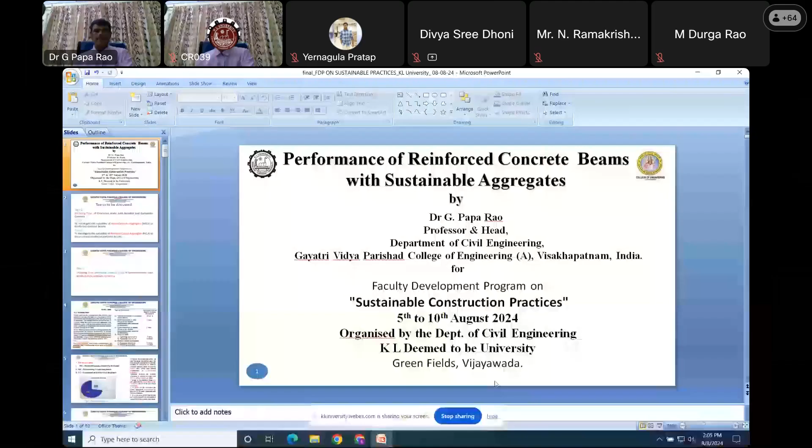System, system. Madam, is it visible now? My presentation... Good afternoon, sir. Screen is not visible, sir. Not visible, yes. Sir, you do one thing - share the screen, sir. Once you close that sharing option, share it again, it will come. Yes, sir. Now, sir. Yes, fine, title slide is there. We can proceed, sir.

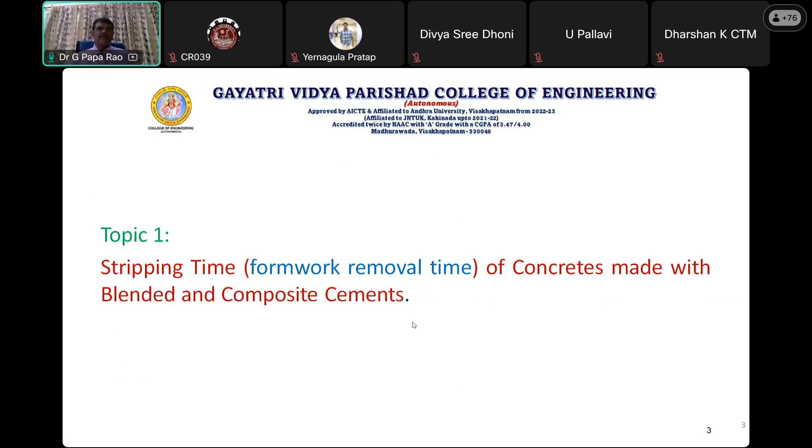One is in normal circumstances where ambient temperature does not fall below 15 degrees centigrade, and the other is where ordinary Portland cement is used. These are the two conditions given in IS 456. But whatever stripping time given in IS 456 is valid only for ordinary Portland cement.

The code is silent about blended cements, because nowadays 70% of cement being consumed is from blended cements like Portland Pozzolana cement, Portland slag cement, and also a new variety called ternary cement or composite cement. The code says for other cements and lower temperatures, the stripping time recommended above may be suitably modified - meaning for cements other than ordinary Portland cement, and for temperatures below 15 degrees centigrade, these stripping times may need modification.

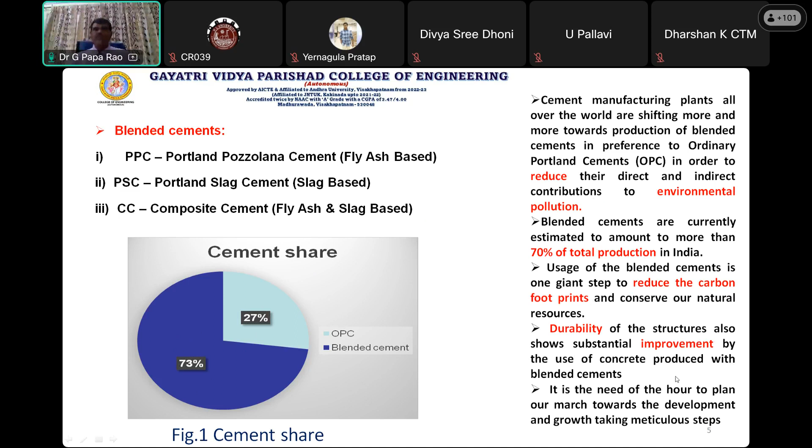All of you are aware about the advantage of blended cement. It reduces the direct and indirect contributions to environmental pollution, and also reduces the carbon footprint. Also from a durability point of view, durability of structures shows substantial improvement by the use of concrete produced with blended cements. This figure shows the carbon dioxide emissions for different cements. As you can observe, the carbon dioxide emissions for blended cements are less than ordinary Portland cement, and the main constituent of cement is clinker.

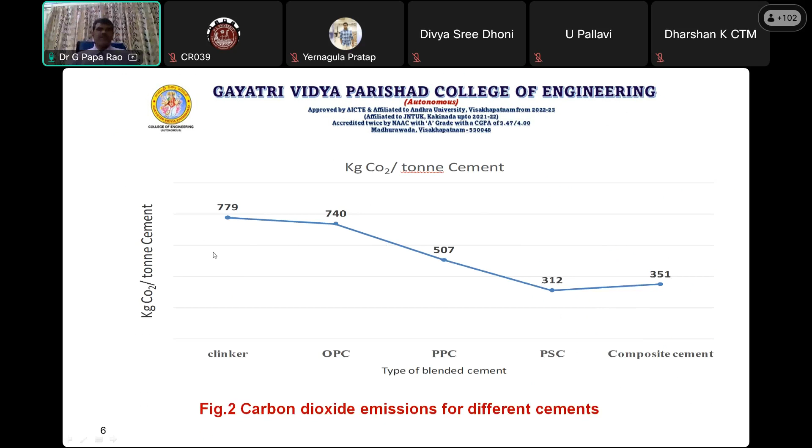In our study, we have considered 4 types of cements. All these cements were procured from a manufacturing unit near Visakhapatnam, 100 kilometers away, which is My Home Industries Private Limited, manufacturing Maha Cement. This company has set up their organization at a location called Narsipatnam, which is 100 kilometers from Visakhapatnam.

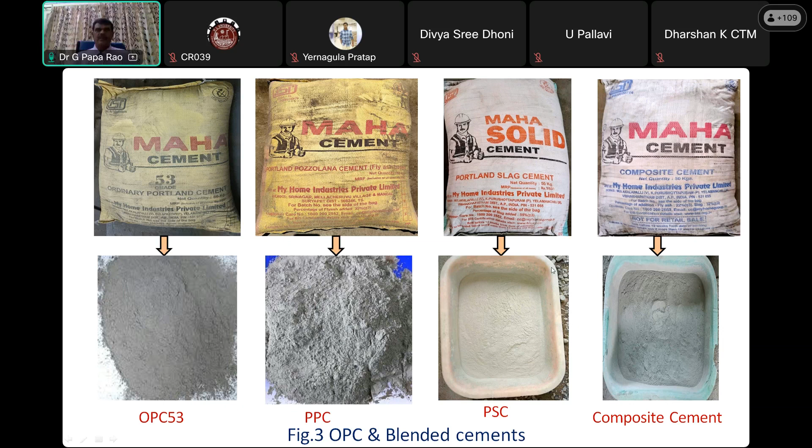We requested them to provide 4 varieties of cement, because we did not purchase from local distributors - for better compatibility, we took all 4 cements from the same manufacturer directly from the manufacturing unit. So we procured OPC 53, Portland Pozzolana cement (fly ash based), Portland slag cement, and composite cement, all procured from Maha Cements at Narsipatnam. This is a new cement that has come into the market, called composite or ternary cement.

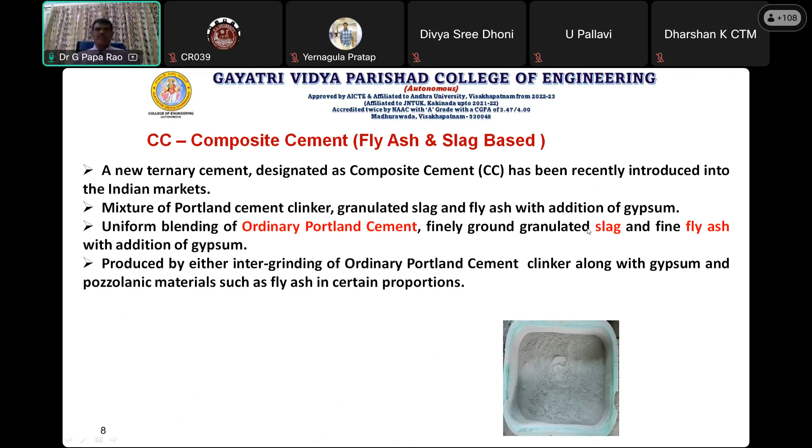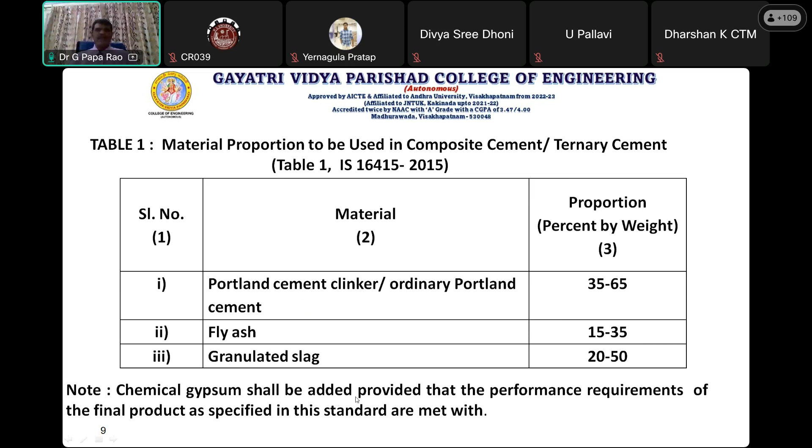This is the combination of ordinary Portland cement, slag and fly ash with addition of gypsum - this is the material proposed to be used in composite or ternary cement. In composite or ternary cement, the Portland cement clinker consists of 35 to 65% by weight, fly ash is 15 to 35%, and the granulated slag is 20 to 50%, plus some percentage of gypsum, provided the performance requirements of the final product as specified in the standard are met.

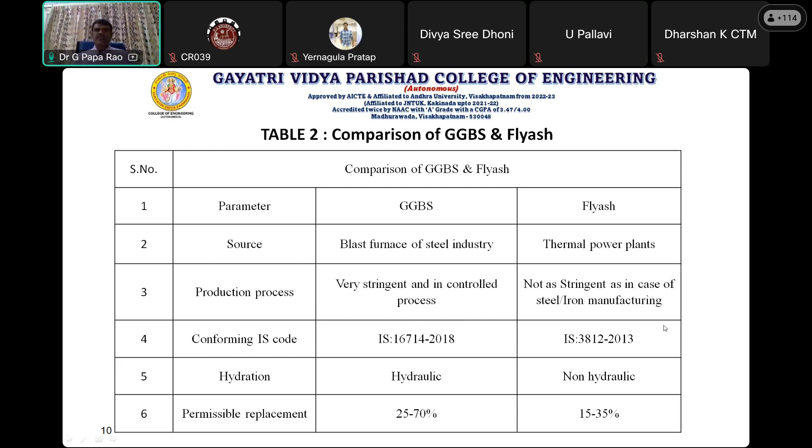GGBS is a pure hydraulic material - if you add water directly to GGBS, it will produce pozzolanic properties. Fly ash won't directly react unless you add some cement, hence it is non-hydraulic. The permissible replacements differ because of this pozzolanic nature: GGBS can be used up to 25 to 70% for industrial applications, while fly ash is up to 15 to 35%.

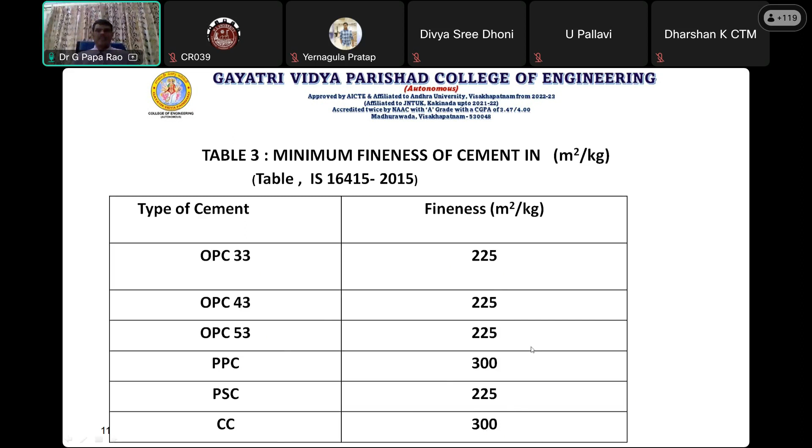This slide shows the minimum fineness of cement. As you can observe, OPC is 225 for all three grades - 33, 43, 53. Composite cement, if you observe, is 300 square meters - this is much finer cement compared to the other blended and ordinary Portland cements.

Before using all the 4 cements, we have assessed whether our cement is okay or not, whether the strengths are being achieved. For that, we have tested the compressive strength of cement for 3 days, 7 days, and 28 days, and taken these strength values from IS 12269.

For OPC 53 grade cement, the minimum strength should be 27 MPa at 3 days, 37 MPa at 7 days, and 53 MPa at 28 days. Similarly, OPC 43 requires 23, 33, and 43 MPa respectively. For OPC 33, the compressive strength must be 16 MPa at 3 days, 22 MPa at 7 days, and 33 MPa at 28 days. This covers ordinary Portland cements.

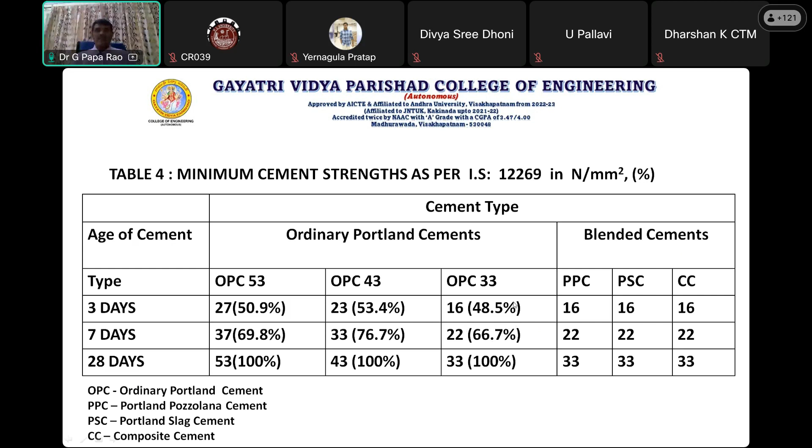For blended cements - PPC, PSC, and CC - at 3 days the strength must be 16 MPa for all, 22 MPa at 7 days, and 33 MPa at 28 days. Our blended cements possess strength equal to OPC 33, meaning at 28 days it should get a minimum of 33 MPa.

So likewise, we have tested all 4 types of cements before proceeding for further investigations. We have cast the cubes with our standard size of 70 by 70 by 70 mm. As per IS code, minimum compressive strength for OPC 53 should get 27 MPa at 3 days, 37 at 7 days, and 53 at 28 days.

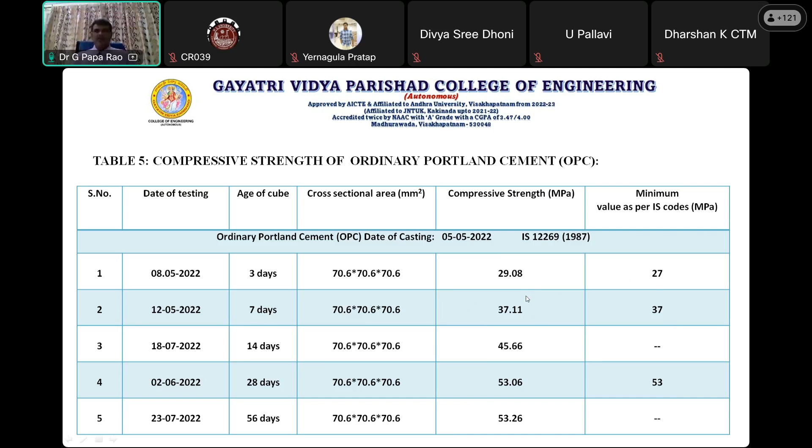These are the strengths obtained from our laboratory tests. We got 29 MPa at 3 days, 37.11 MPa at 7 days, and 53.06 MPa at 28 days. Therefore our cement is good, and we can proceed with further investigations using OPC 53 because it is almost meeting Indian standard specifications.

Similarly for PPC, the requirement is 16 MPa at 3 days, 22 at 7 days, and 33 at 28 days. Our laboratory tests got 16.3, 22.4, and 33.18. Therefore we can proceed further with PPC for further tests.

Similarly, Portland slag cement (PSC) we have tested up to 56 and 90 days also for durability testing. Here PSC got 16.04, 23.73, and 33 MPa. These values are meeting our Indian standard specifications.

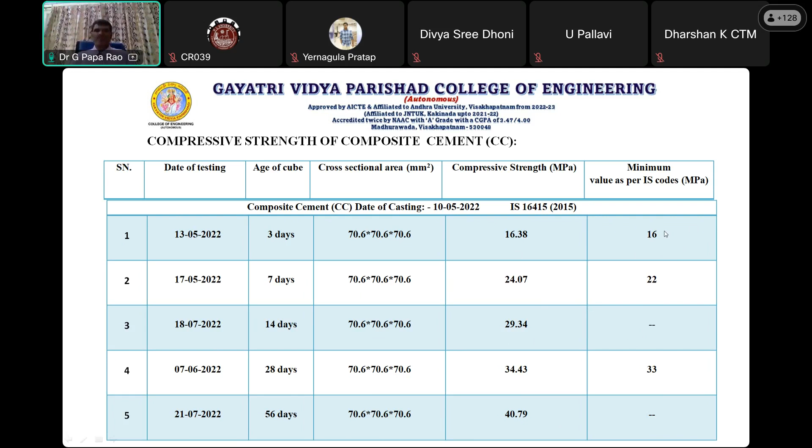Composite cement is a ternary cement, a mixture of OPC plus PPC and PSC, or fly ash plus slag plus clinker. It got 16 MPa at 3 days, 24.07 MPa at 7 days, and 34.4 at 28 days. Whatever cements we procured from mass cements, we confirmed their strengths before going for further investigation.

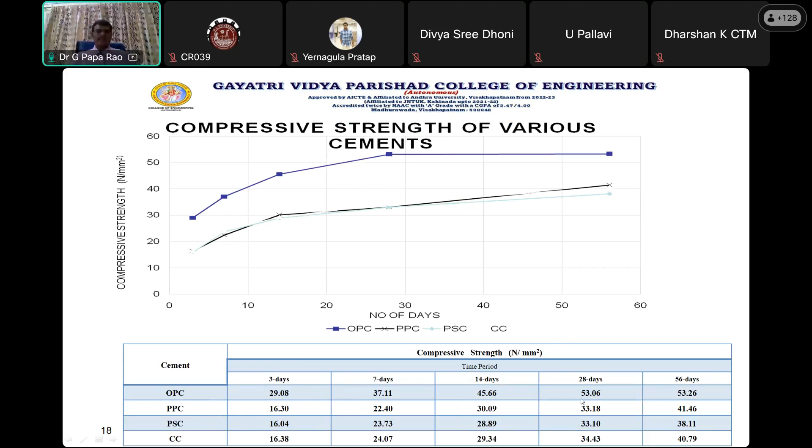This is the same table presented in another form - OPC gives 29, 37, 45, and 53 MPa, and similarly for PPC. These are the strengths we obtained, and we have chosen for concrete testing M35 grade concrete.

These are the mix proportions used for different grades of concrete with different types of cements - OPC, PPC, PSC, and CC. These show the consumption of different constituents: cement, water, fine aggregate, and coarse aggregate - the material proportions.

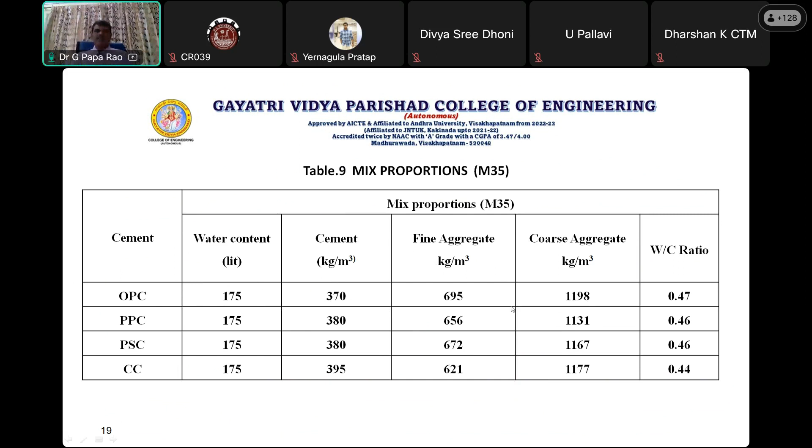Our focus here is to arrive at the stripping time for blended cements, because IS 456 speaks about stripping time only for OPC. Therefore we need to arrive at stripping times for the other blended cements.

At 7 days we got OPC strength of 26 MPa, 34 MPa at 14 days, and 44 MPa at 28 days. We estimated the percentage strength of OPC at 7 days with respect to 28 days: 26 by 44 gives 59%. Similarly, we calculated the percentage strength at 14 days with respect to 28 days. Our OPC M35 grade concrete got 78% at 14 days and 59% at 7 days.

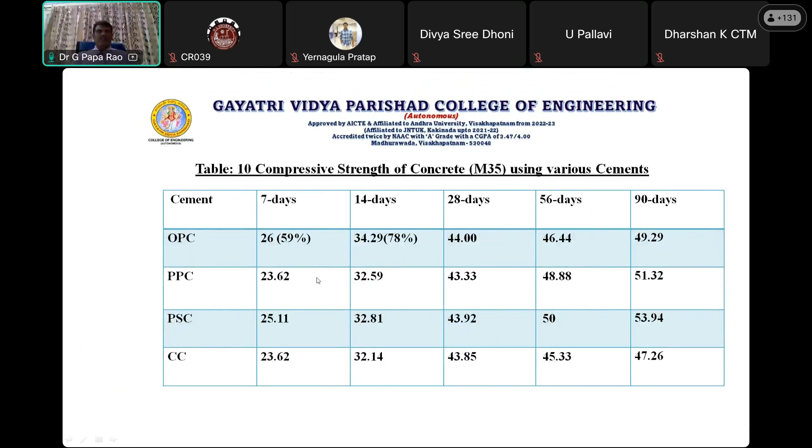Since we focused on 7 days and 14 days, if you observe, these align with the stripping times specified in IS 456. We have plotted a graph between the percentage strength of concrete and various types of cements, showing OPC reaches 59% strength at 7 days.

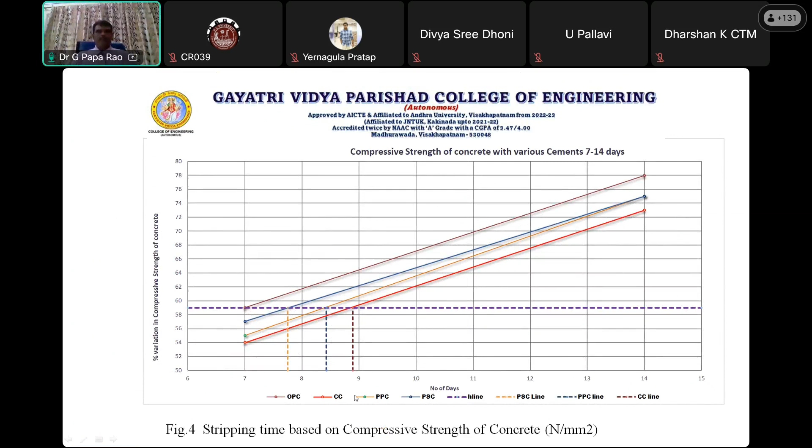We took this 59% as the baseline and observed at what duration the other cements like PPC, PSC, and CC achieve the same 59% strength. Our composite cement reaches this nearly at 9 days instead of 7, and PSC takes 8 days, also observed at 14 days.

Here our OPC is getting 78% of its 28-day strength at 14 days. So we have taken 14 days at 78% as the base, and compared at what ages our other remaining cements are getting the same percentage, 78%. If you observe, the other cements reach the same strength at 16 days, 17 days likewise. So we have tabulated the same.

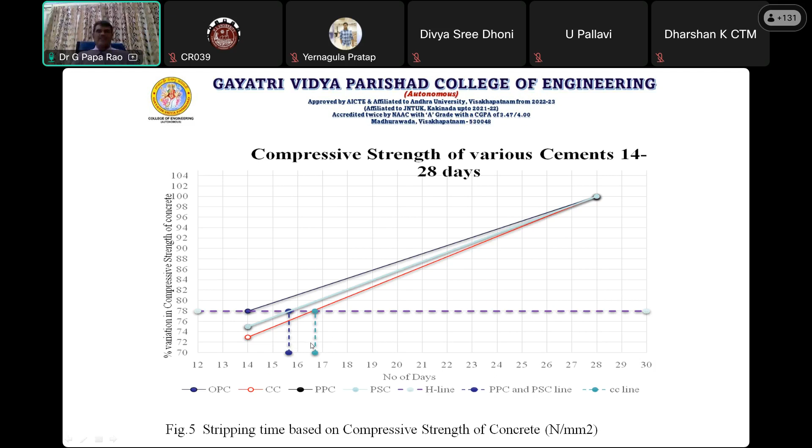Here the stripping time for OPC is 7 days. If you see PSC, slag cement, and PPC, Portland pozzolana cement, the same stripping time we are getting for PSC is at 8 days, and PPC is at 9 days. Again for composite cement it's 9 days, while for OPC it's 7 days.

Similarly, at 14 days stripping time, our OPC is 14 days, and the other cements are giving the same strength at 16 days and 17 days. So the conclusions we have drawn from our study is that the 7-day and 14-day strengths obtained in concretes made with OPC could be obtained only after 9 days and 17 days with blended cements.

Our stripping time for concrete made with OPC is 7 days, but if you use other blended cements like PSC, PPC, and composite cement, this time is delayed by another 2 days, to 9 days. Again at 14 days, this time is delayed by 3 days, to 17 days. So the stripping time of blended concretes is delayed by 2 days for 7-day strength and by 3 days for 14-day strength. These are the observations we have made from our study, arriving at the stripping time for concretes made with blended cements.

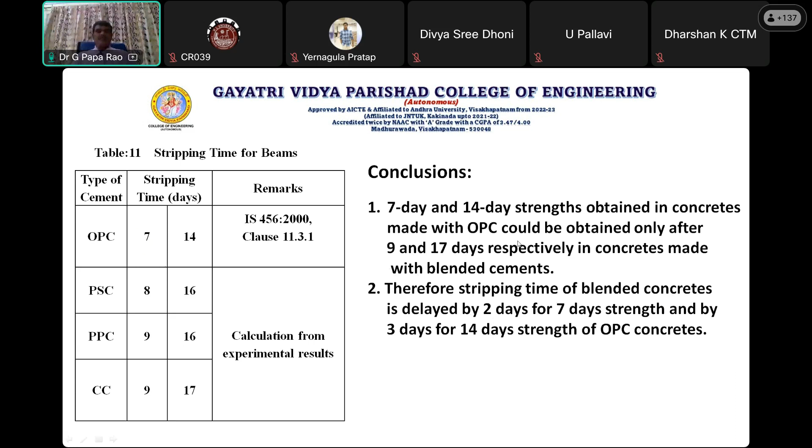So coming to my topic 2, this is also one of the sustainable development approaches using alternate coarse aggregate, because nowadays our natural resources, fines and coarse aggregates, are depleting soon because of the high-rise constructions, and therefore we need to save our natural resources by using alternate sustainable materials.

So this is one of the new aggregates we have developed. We have an MOU with NTPC and also with a national organization called Ecocarbon Private Limited, to carry out structural engineering studies for concretes made with nano concrete aggregate. So this nano concrete aggregate is the new material, one of the industrial byproducts.

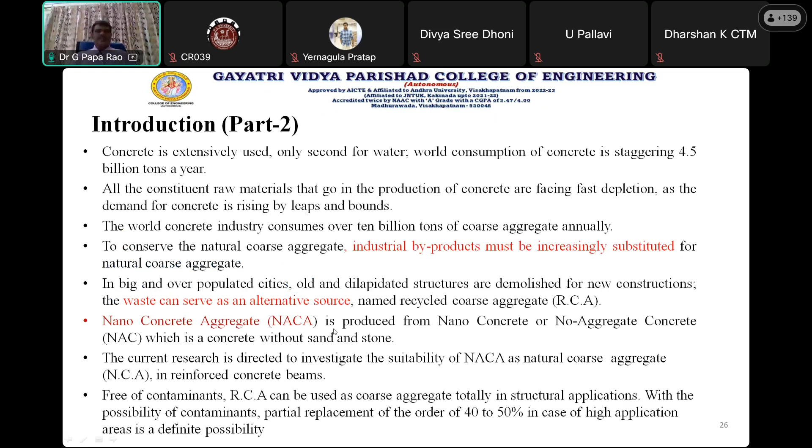This nano concrete aggregate is produced from 76% of fly ash, with 20% cement, along with mineral admixtures. So this aggregate is made with almost 76% fly ash. Nowadays we are using fly ash as a cement substitute, up to 25-30% replacement. But here these aggregates are made with complete fly ash material. The total composition is 76% fly ash with 20% cement and another 4% mineral admixtures.

So they prepare the concrete bunds, like our stone bunds. What we do to get the natural aggregate is we take stones from hillocks and crush them using our crushers, and that material we use as coarse aggregate. Similarly, this new material called nano concrete aggregate is made with stone-like nano concrete bunds, and these will be crushed by our crushers to prepare these aggregates.

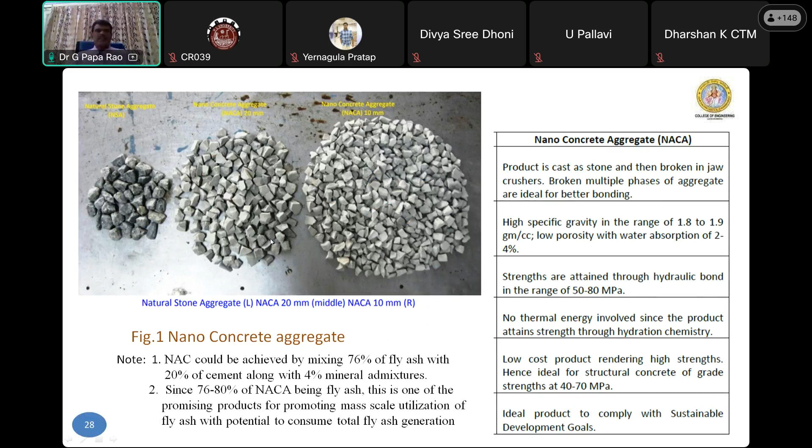This nano concrete is made with 50 to 80 MPa strength, and these concrete bunds will be crushed in a crusher to make this coarse aggregate. So here, it's a low cost product yielding high strength, and ideal for structural concrete of grades 40 to 70 MPa. So the genesis for developing this sustainable aggregate made with fly ash...

Up to for low strengths of concrete, they are using natural stone. But to meet high strength concrete requirements, Bangladesh is importing stone from India. Similar conditions prevail in North India, necessitating procurement of natural stone from farther places. Even Sri Lanka is stopping this mining process and importing aggregates from neighboring countries. Similarly, some of our northern countries are also planning to stop mining.

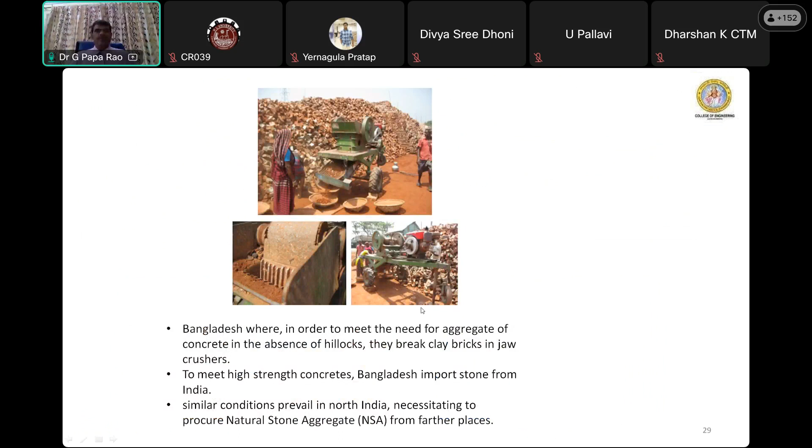They want to procure stone aggregates from neighboring states. Keeping this in mind, inventors have developed this fly ash aggregate. This is the process of making fly ash aggregate, which is a mixture of fly ash, cement, gypsum, plus other mineral admixtures.

This concrete is made with roller mixers instead of drum mixers. This is the type of concrete we get, and we store it in containers where they cure it. They take the bunds, and those bunds are crushed in crushers to make fly ash aggregate.

This is the fly ash aggregate. This is the 20mm size coarse aggregate, and this is the 10mm size coarse aggregate. This concrete is completely made with fly ash, cement, and gypsum.

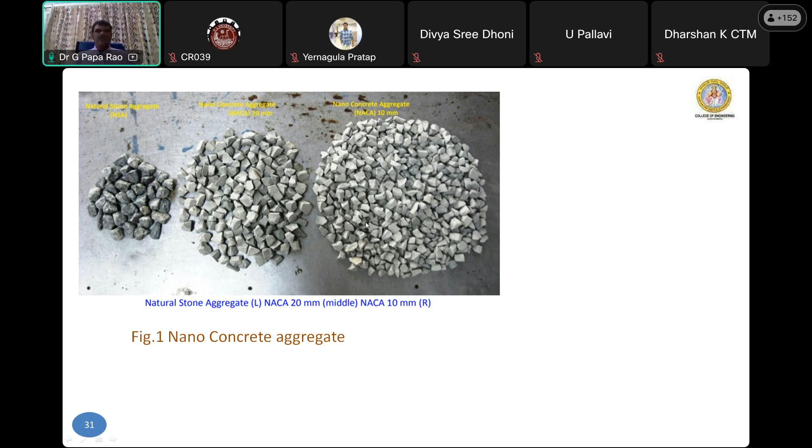This is one of the sustainable developments. Of course, this includes some comparisons made with our nano concrete against our conventional concrete.

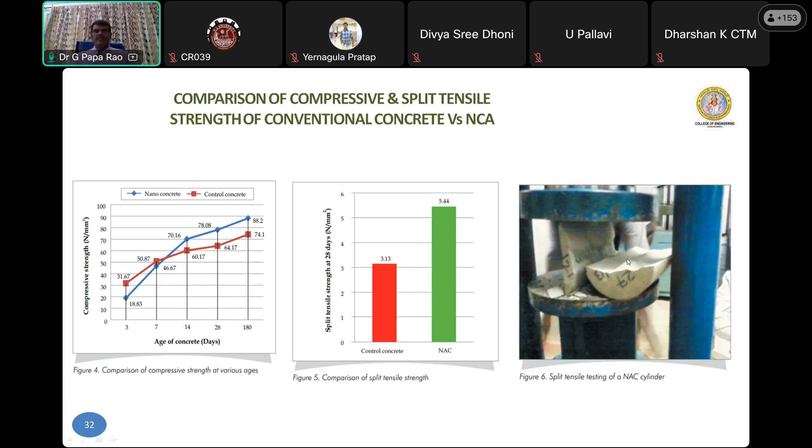So if you make dome or arch type structures, that concrete is very strong in compression - we're getting up to 80 MPa, M50 to M80 grade. Therefore, dome types of structures are very suitable for this concrete.

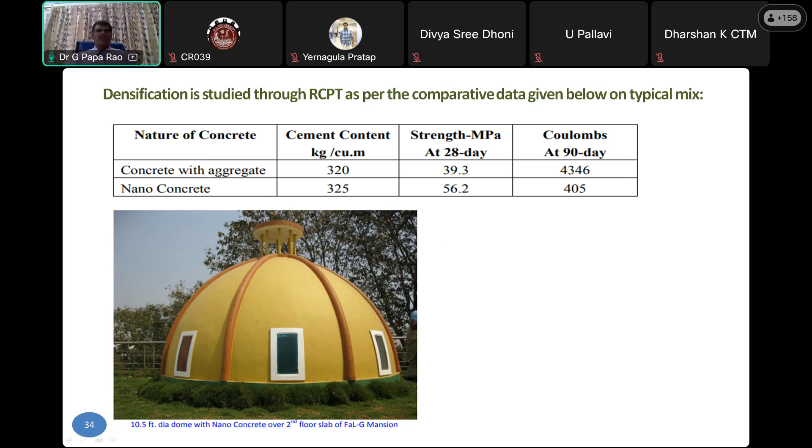Again, if you see our RCPT, we have conducted this permeability test also. If you observe, this nano concrete gives 405 coulombs against our conventional concrete which gives 4346 coulombs at 90 days.

So we have taken our fly ash aggregate, and for structural engineering studies, we have taken 3 specimens, 3 RC beams. The first beam has 100% natural aggregate plus 0% nano concrete. NACA means nano concrete aggregate.

The aggregate is made from nano concrete. Our nano concrete is made with 76% fly ash, 20% cement, and 4% other mineral admixtures with gypsum. This is the conventional beam, which has 100% natural aggregate.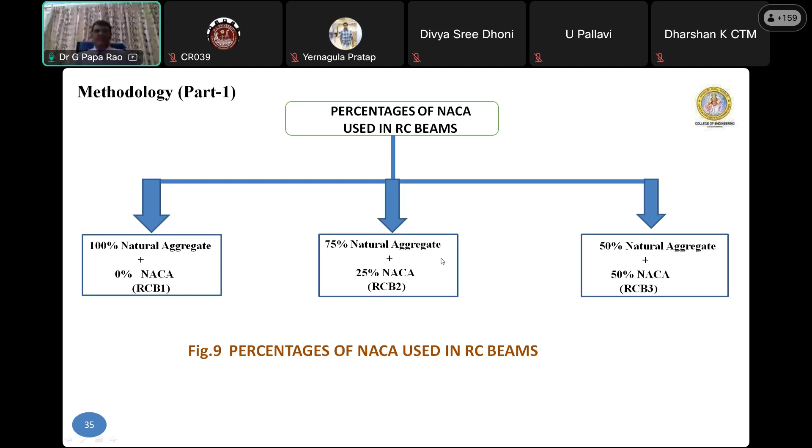In the second specimen, we have taken 75% natural aggregate and 25% nano concrete aggregate. Similarly, the third specimen has 50% natural aggregate and 50% nano concrete aggregate - meaning 0% NACA, then 25% and 50% replacements. So we have conducted tests for both natural aggregate and nano concrete aggregate.

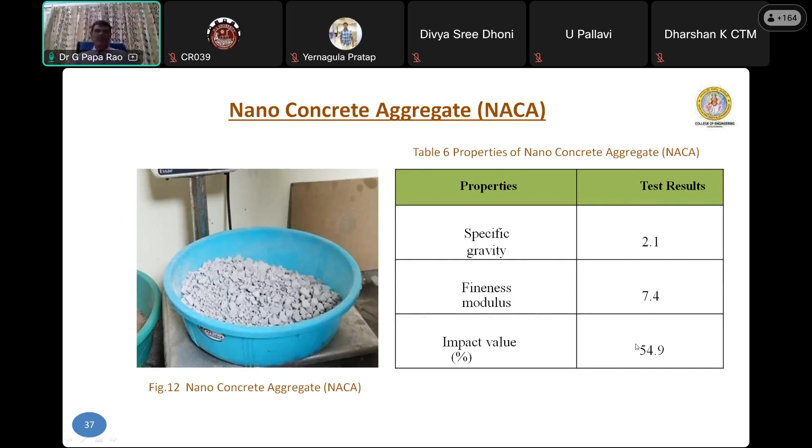The impact value is high at 54.9 as against 30% in our natural aggregate. So therefore, we can easily use this material for road works also as aggregate, because it possesses high impact value. These are the experimental studies.

Here we made 3 beams designated as RCB1, RCB2, and RCB3. This is the geometry of our specimen. For all 3 specimens, we made all the geometrical properties the same, because the only variable is the percentage replacement of our nano concrete aggregate, or simply fly ash aggregate, since the majority component for making that concrete bond is fly ash.

Initially, because of some shortage of fly ash aggregate, now we have procured ample amount. Here now, this is with scarcity or shortage of aggregate. Initially, we have planned small beams.

These are the specifications: width of each beam is 100 mm, depth is 200, effective span, and the longitudinal steel reinforcement, top 2-12, bottom 3-12. Shear stirrups are the same for all 3 beams, and water cement ratio is 0.45. And these are the cube compressive strengths, split tensile strength, and yield strengths.

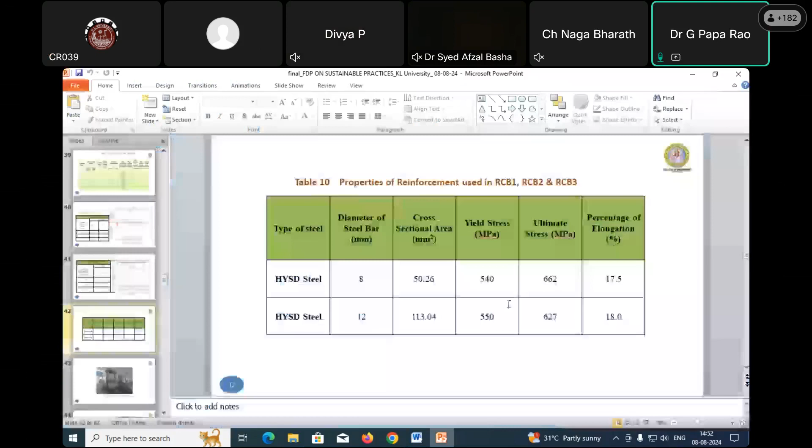So these are the two types of reinforcement we have used for our investigation, and we have tested the mechanical properties of both the steels. So already I have explained about the failure conditions or modes of failure for the three beams.

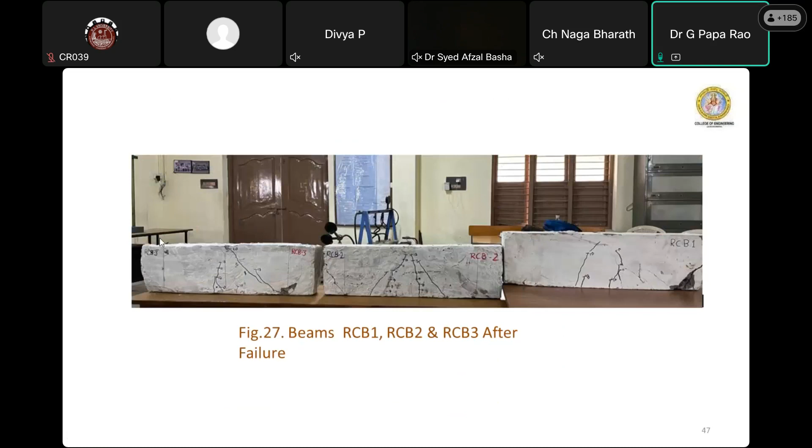Here you can observe beam 1, RCB1, failed in flexure, RCB2 failed in flexure, and RCB3 at 50% we observed the mode of failure slightly change from bending to shear. RCB3 is 50% natural aggregate and 50% fly ash aggregate, which is called nano concrete aggregate.

So here these are the experimental results or the principal test results. If you see this, our RCB1 with 100% natural aggregate and 0% fly ash aggregate or nano concrete aggregate failed at 120 kilonewtons.

Whereas RCB2, which is 25% natural aggregate... sorry, 75% natural aggregate and 25% fly ash aggregate, failed at 140 kilonewtons, and RCB3 is 50% and 50% fly ash aggregate, showing our load carrying capacity.

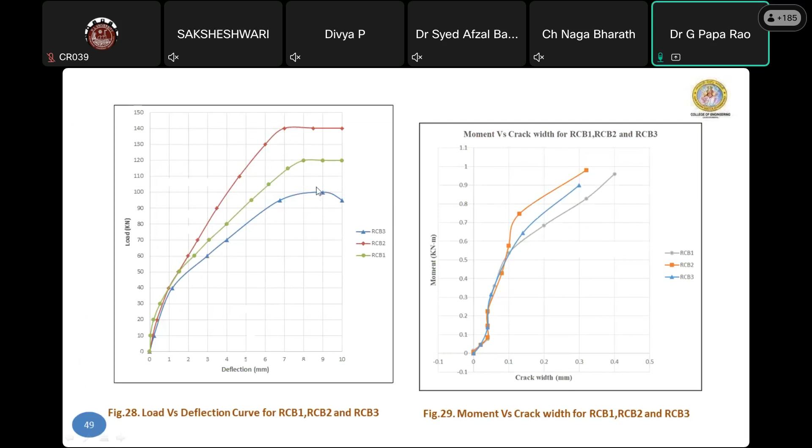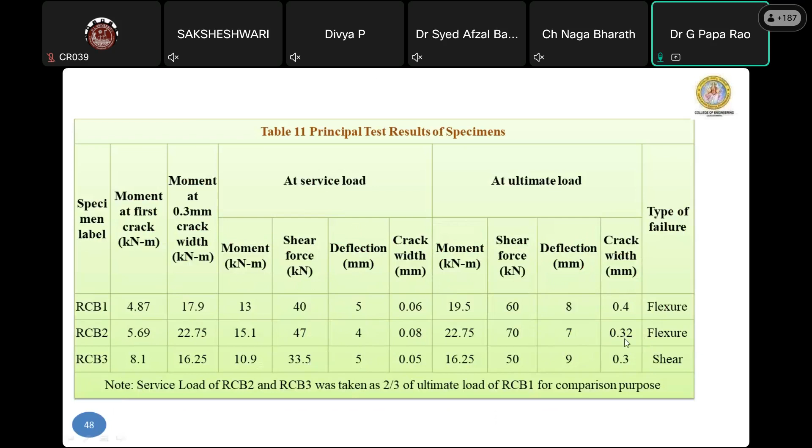From the observations of 3 beams, we can conclude that RCB2, made with 25% fly ash aggregate (also called nano concrete aggregate) and 75% natural aggregate, failed at 15% higher load than beam RCB1, made with 100% conventional aggregate. RCB2 with fly ash aggregate exhibited values at par with the companion beam.

Similarly, the beam made with 50% fly ash aggregate and 50% natural aggregate failed at 17% lesser load than RCB1, made with conventional aggregate. The mode of failure observed in RCB1 and RCB2 was flexure, while in RCB3 the mode of failure slightly changed from flexure to shear. Based on the current results, we suggest up to 25% replacement.

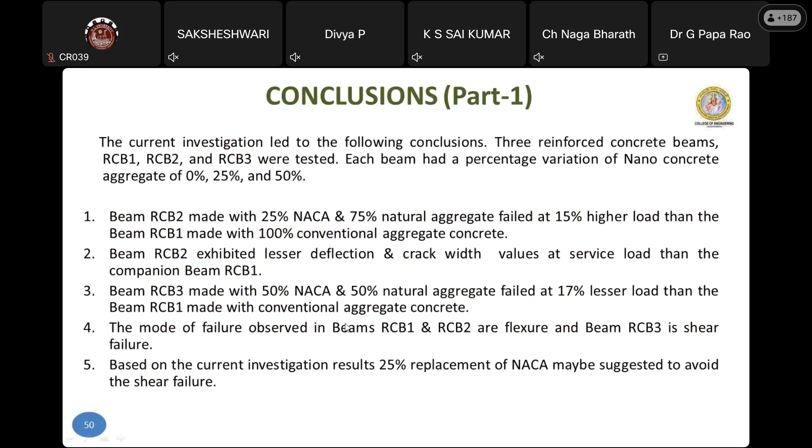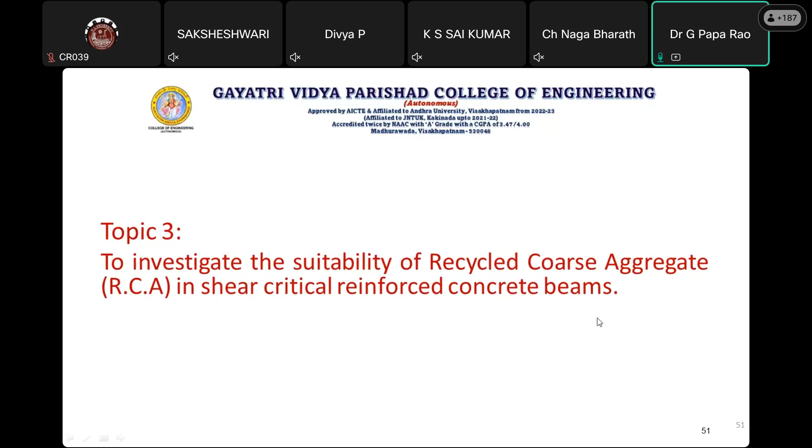What I have chosen for this lecture is the suitability of recycled coarse aggregate. Again, we have used recycled coarse aggregate in shear critical reinforced concrete beams. This is one of the MTech dissertation works done by my MTech student.

These are the preparation stages. We used labor and a process for making recycled aggregate from demolished concrete.

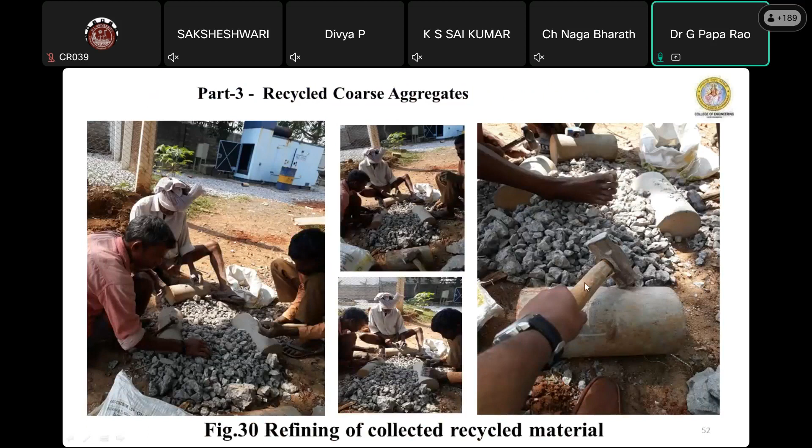This is the refining of the collected recycled material. We planned 6 beams. The first is the natural aggregate beam, NAB1, with 0% recycled and 100% natural coarse aggregate, and no shear reinforcement was provided.

NAB2 again used 0% recycled aggregate and 100% natural coarse aggregate, but here we provided shear reinforcement. We designed this beam for shear reinforcement, but deliberately did not design shear reinforcement for the first beam, to ensure that the mode of failure observed would be shear.

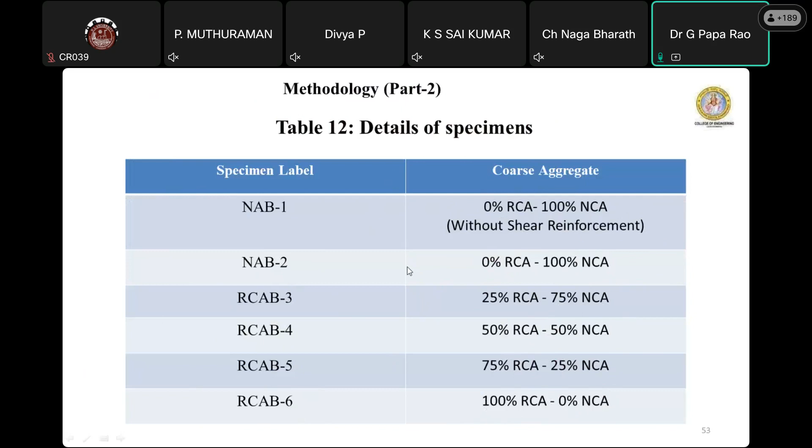Similarly, for the recycled and natural coarse aggregate beams: RCAB4 used 50% recycled and 50% natural coarse aggregate, RCAB5 used 75% recycled and 25% natural, and RCAB6 used 100% recycled coarse aggregate and 0% natural. These are the 6 beams we planned for our experimental investigation.

The flexural reinforcement at bottom is 3-16 and at top is 2-10, and the water cement ratio is 0.5. These are the cube compressive strengths achieved at 28 days for the different concrete specimens, with slight variation because these beams were cast at different durations.

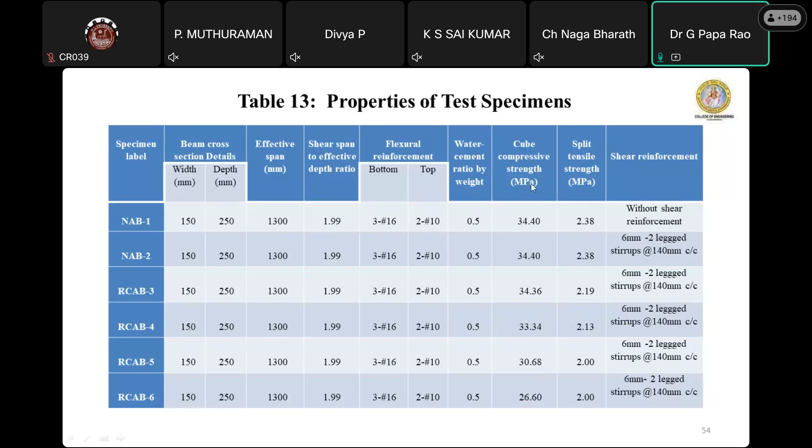This is the shear reinforcement used for the 5 beams; deliberately we did not provide any shear reinforcement to the first beam, to study behavior without it. This covers the properties of the test specimens, shown here in graphical form.

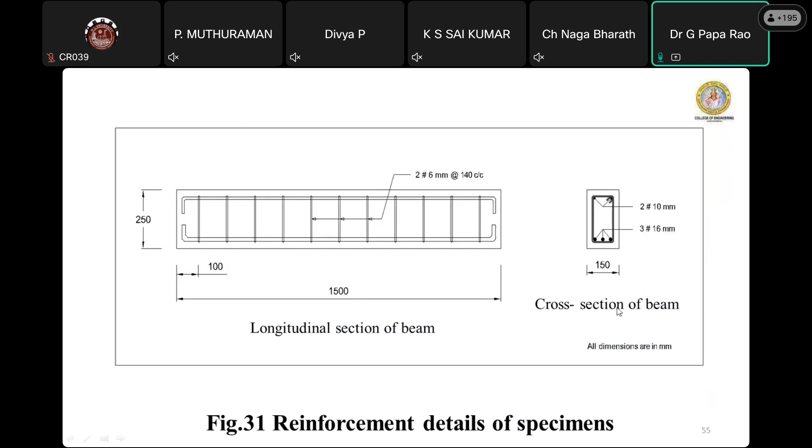This is the longitudinal section with an overall span of 1.5 meters and cross section dimensions of 150 by 250. We also tested the mechanical reinforcement properties in our experimental investigation, as it is our regular practice to test all materials used for the experiment.

We need to test the materials and use the actual values obtained, not assumed values like 415 or 400. Whatever stresses we obtain from our experimental observations, these stresses will be used in our design.

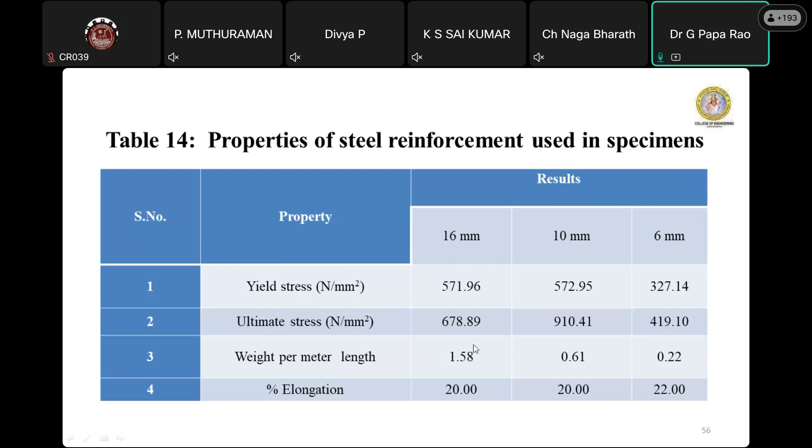We tested the specific gravity of the coarse aggregate: recycled coarse aggregate is 2.63, while natural is 2.7. Water absorption is slightly higher for recycled aggregate due to waste material content; natural coarse aggregate water absorption is 0.7. The impact value is slightly less for recycled aggregate compared to natural coarse aggregate.

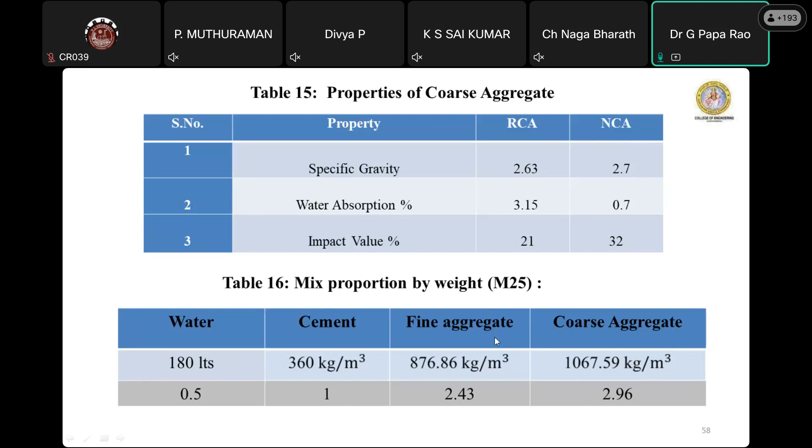We used M25 grade concrete with a mix proportion of 1:2.43 and water cement ratio of 0.5 for making the 6 RC beams. This is the mix proportion used, which remains the same for all 6 beams.

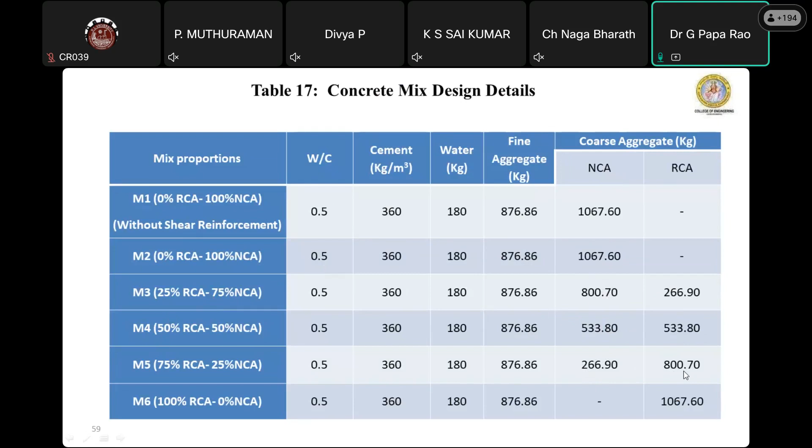Our first beam is 100% natural coarse aggregate, and the second beam is also 100% natural coarse aggregate. The third beam is 25% recycled and 75% natural coarse aggregate. The fourth one is 50% natural, 50% recycled. The fifth is 75% recycled coarse aggregate and 25% natural. And the sixth one is 100% recycled coarse aggregate.

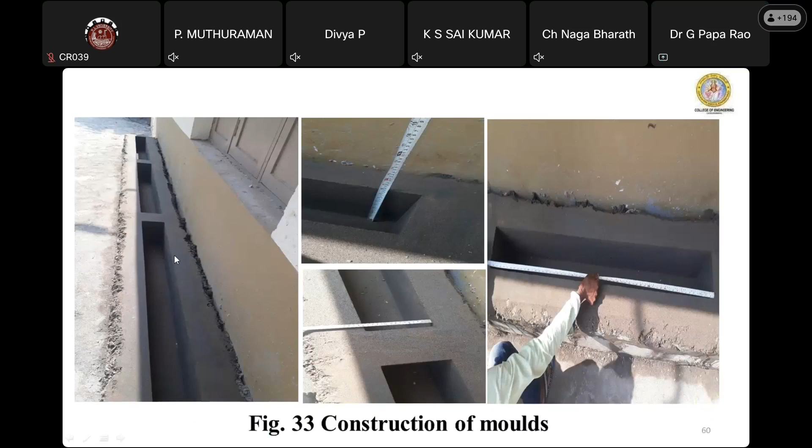We are casting the specimens in these molds, which were also prepared with bricks and well finished. This is the casting of beam specimens with our MTech and UG students helping, along with the control specimens such as cylinders and cubes.

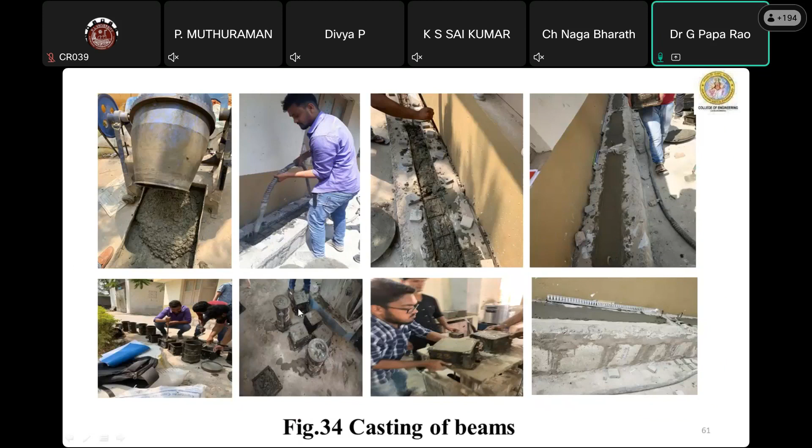This is the curing for 28 days, and after 28 days we have removed and demolded the specimens. These specimens were ready for testing.

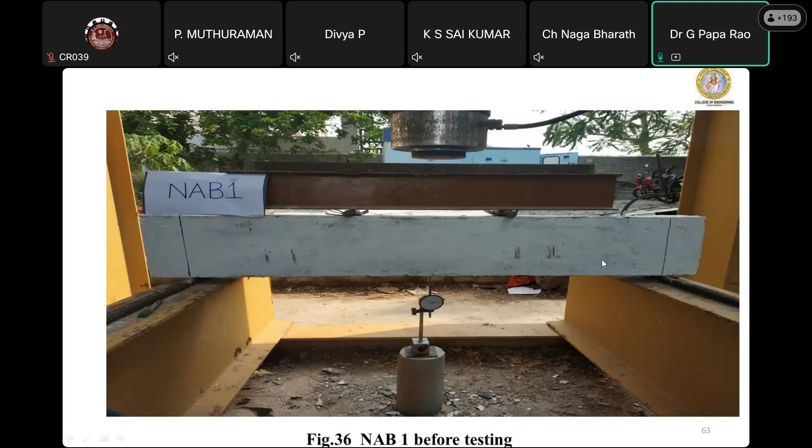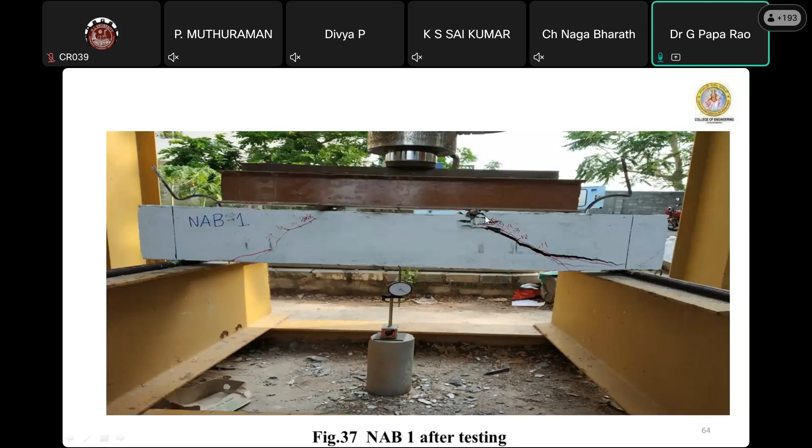This beam, NAB1, was 100% natural coarse aggregate, 0% recycled, and this beam was deliberately not provided any shear reinforcement to ensure the beam fails in shear. This is the observation after testing, and the mode of failure was confirmed as shear.

Again, NAB2 is 100% natural aggregate and 0% recycled. As mentioned in the topic, we are observing the performance of recycled coarse aggregate in shear-critical beams. We made shear critical because, although the beams were designed and provided with shear reinforcement, we assessed the shear carrying capacity by ensuring all beams failed in shear, to understand how recycled coarse aggregate performs in shear-critical beams.

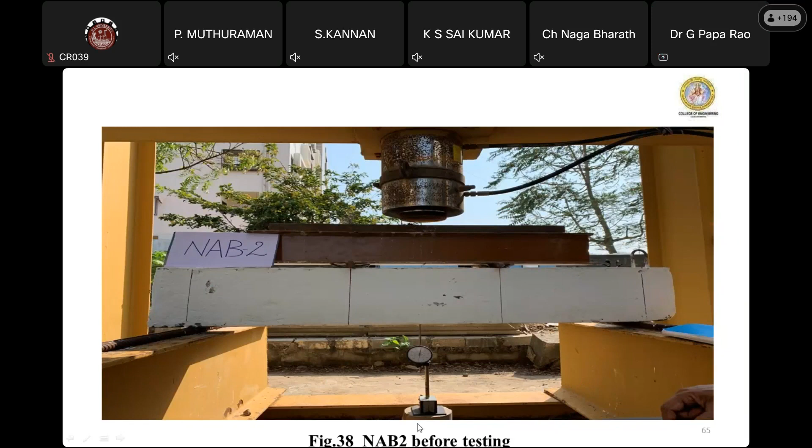This is NAB2 after testing. We allowed this beam to fail in shear, and it was indeed failed in shear.

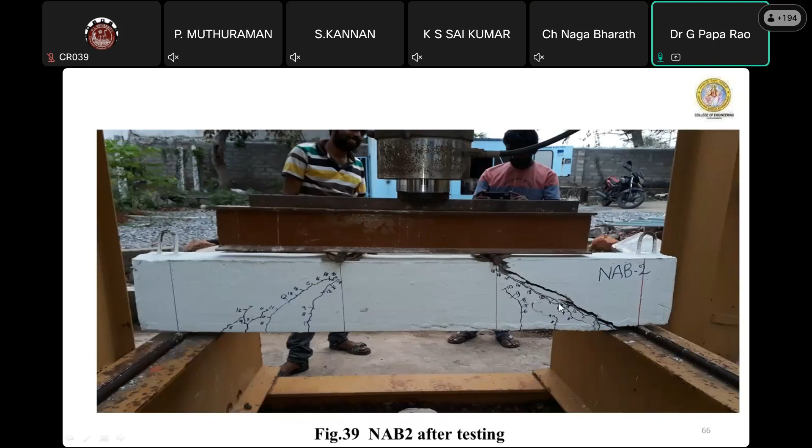Similarly, RCAB3 is 25% recycled coarse aggregate and 75% natural coarse aggregate. This is after testing; you can see it also failed in shear.

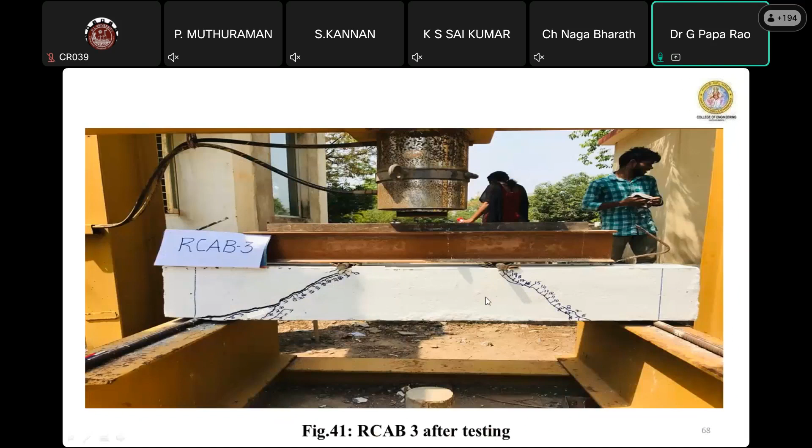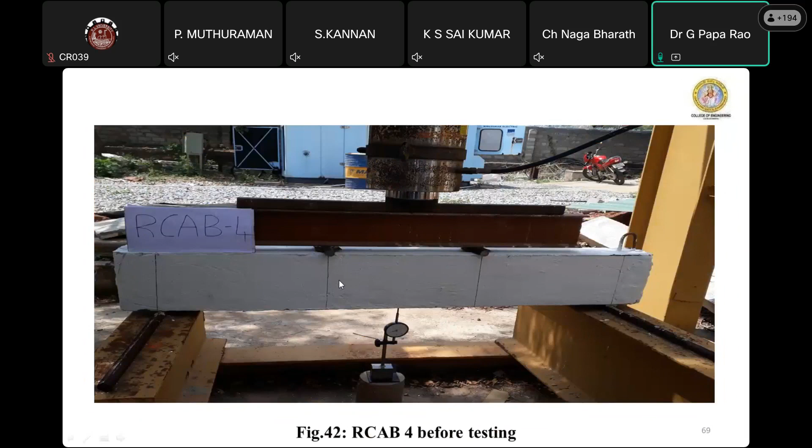This is RCAB4, with 50% natural coarse aggregate and 50% recycled coarse aggregate. Again, you can observe the mode of failure here is shear.

RCAB5 has 75% recycled coarse aggregate and 25% natural coarse aggregate. Again, the mode of failure is shear.

We made all the experimental loading frames available in our lab, where we set up our beams before testing. This is the arrangement for measuring deflection; we have arranged the dial gauge at the bottom.

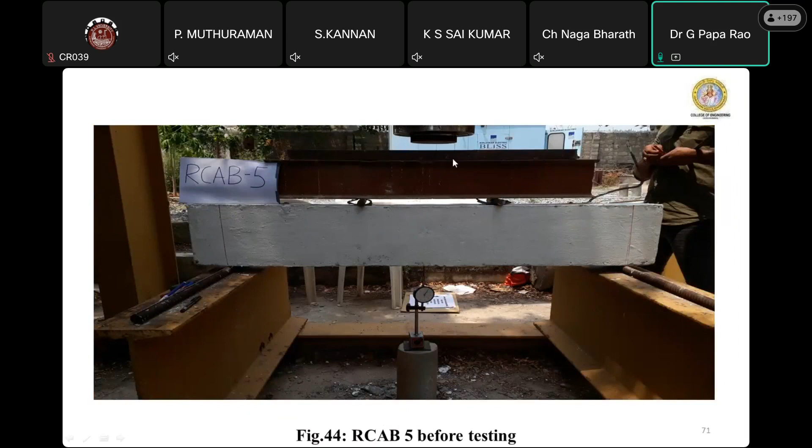We applied a two-point load for testing using a hydraulic jack with a programmed loading control unit to apply the load, and this hydraulic jack pushes the beam.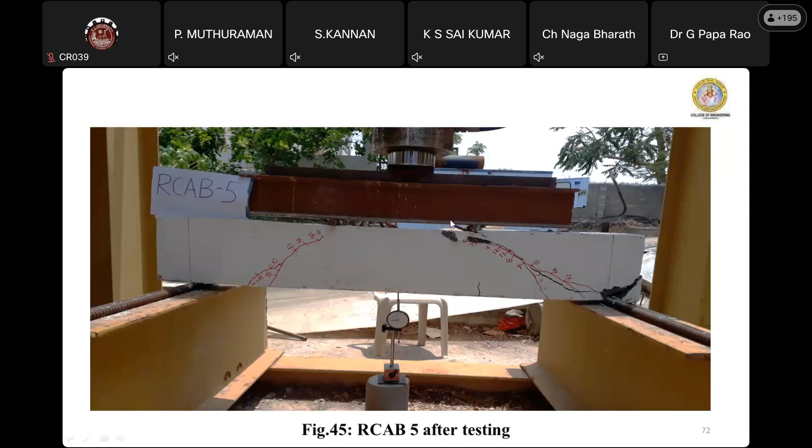We measured deflections and crack widths, and comparisons were done at the same shear force. The 53.33 kilonewton service shear force for NAB2 was used as the reference, and the remaining beams were also compared at the same 53.33 kilonewtons since the beams were failed in shear.

Madam, your screen is not visible. Sir. Yes, sir, it is visible now.

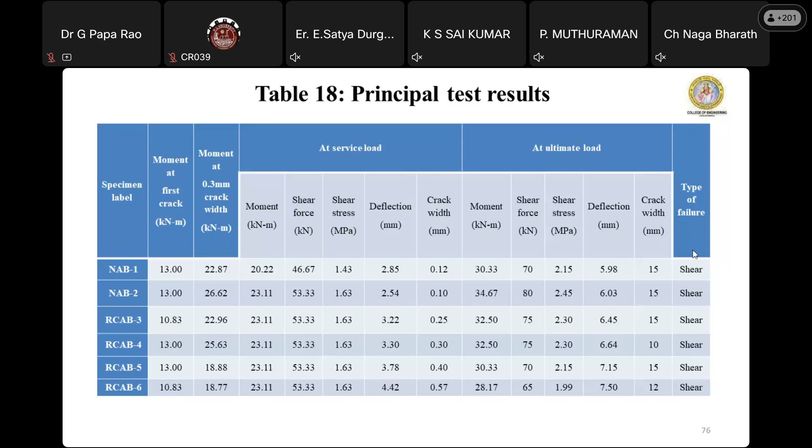Sir, your voice is not audible, sir.

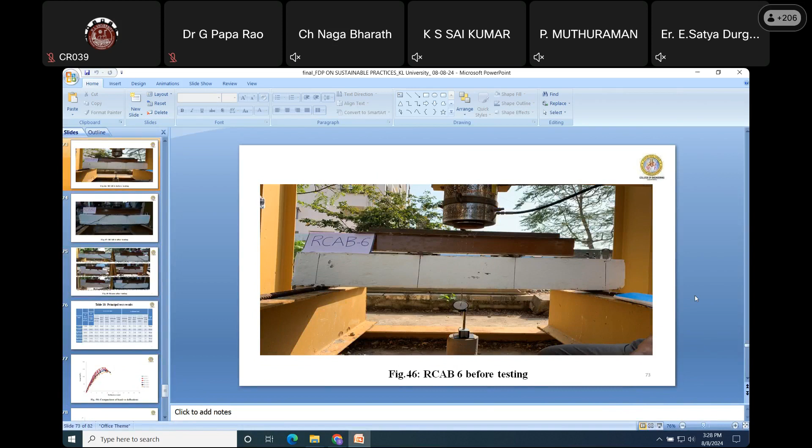Yeah, sir. Sorry for the inconvenience. The internet issue, I don't know, suddenly it has encountered. I tested it this morning and it was working well. Sorry for the inconvenience, so we are now at the end of our presentation.

These are the principal test results we derived from our experimental observations with recycled coarse aggregate. As already mentioned, our companion specimen is NAB2, which is 100% natural coarse aggregate with 0% recycled aggregate. We took its service working load as the reference for all beams to compare deflections and crack widths at the same load.

If you observe deflections and crack widths at the service load: for NAB2, deflection is 2.54 mm with crack width 0.1 mm. Similarly RCAB3, with 75% natural and 25% recycled coarse aggregate, induced 3.2 mm deflection and 0.25 mm crack width. RCAB4 shows 3.3 mm and 0.3 mm. RCAB5, with 75% recycled and 25% natural coarse aggregate, and RCAB6 were also observed. Among all these beams, RCAB4, with 50% natural and 50% recycled coarse aggregate, induced a 0.3 mm crack width at service load.

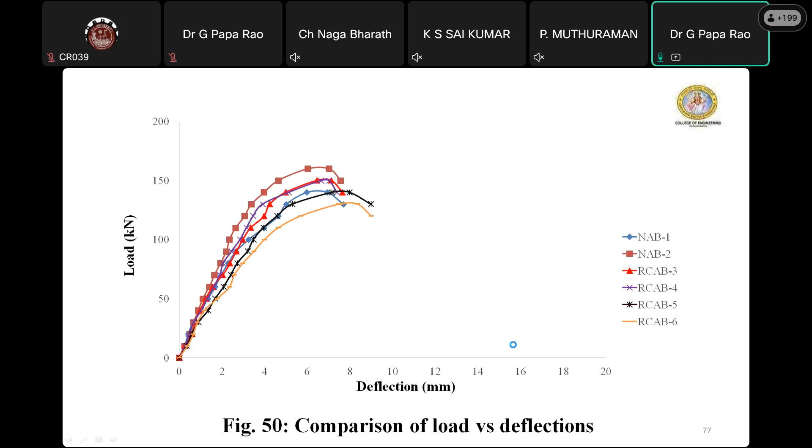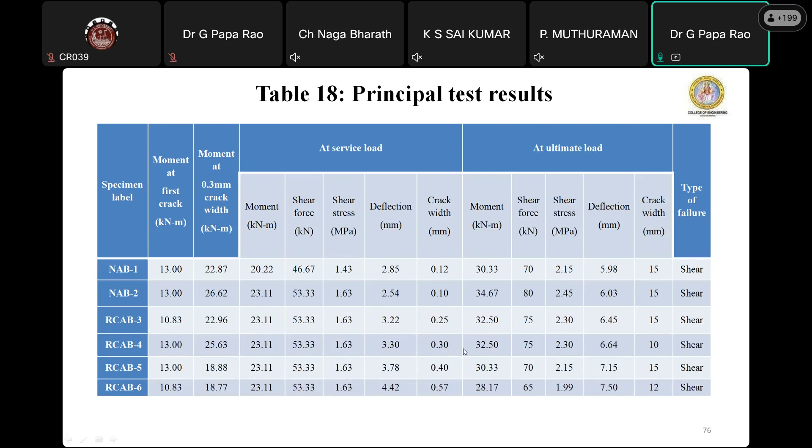Use of recycled coarse aggregate in shear critical RC beams results in a small percentage reduction in shear strength. At service load, the deformations, deflection, and crack width increase with increasing percentage of RCA. If the percentage of replacement is higher, deflection values and crack widths also slightly increase. Therefore, we can limit recycled coarse aggregate up to 50% based on our observations.

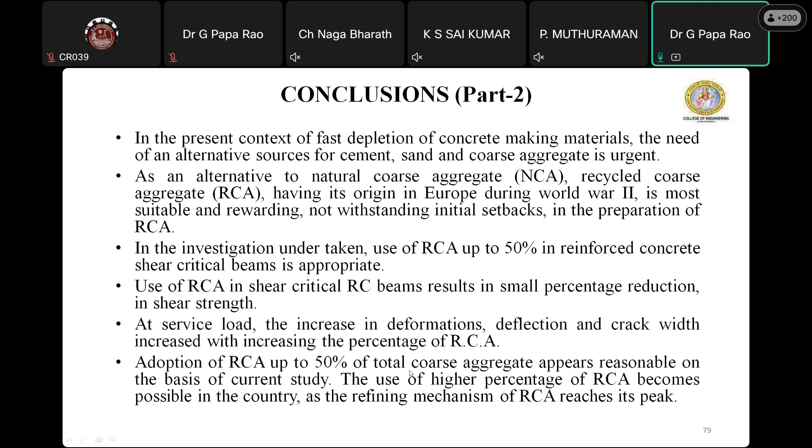Adoption of recycled coarse aggregate up to 50% of total coarse aggregate appears reasonable based on the current study. Use of a higher percentage of recycled coarse aggregate becomes possible as the refining mechanism of RCA reaches its peak. If we ensure that the refining mechanism is large scale and well processed, we can use higher percentages also. But based on our observations, we suggest up to 50% replacement of natural coarse aggregate with recycled coarse aggregate is reasonable based on the current study.